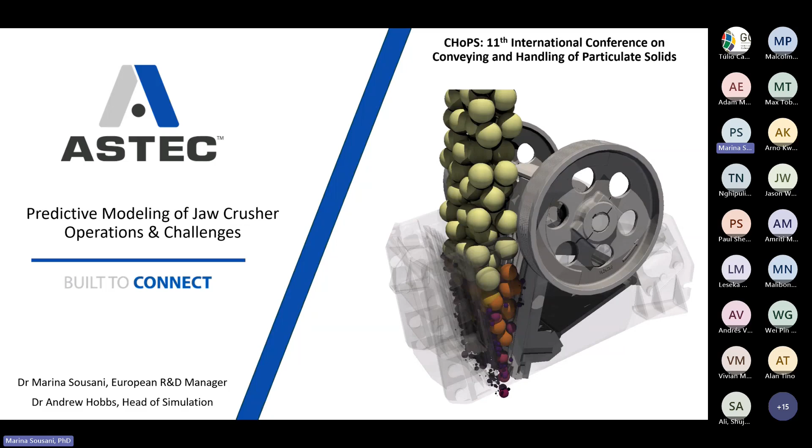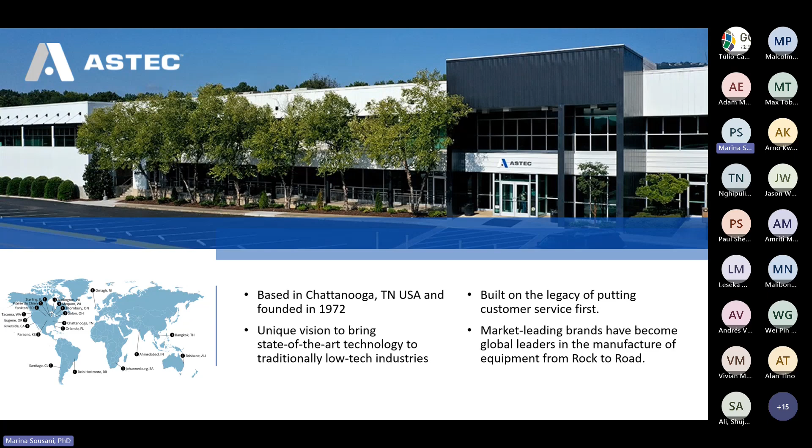A few words about Astec. The company was founded in the 1970s. The headquarters are in Chattanooga, USA, with a number of facilities around the US and a few in other places in the world, including Europe, even though you cannot see the European facilities on this map. Astec owns a number of market-leading companies that have become global leaders in the manufacture of equipment. Overall, the vision of the company is to bring state-of-the-art technology to traditionally low-tech industries, but also a very important part of our vision is to stay closely connected with all of our customers.

Astec Industries is a global equipment manufacturer with a portfolio of brands serving material solutions, infrastructure, and mining industries. This means we manufacture more than 100 products, from rock crushing and screening plants to hot mix asphalt facilities, concrete plants, milling machines, asphalt pavers, and material transfer vehicles. Overall, the portfolio covers everything from rock to road.

A little bit of introduction regarding this old problem: the basic design of jaw crushers hasn't changed much since, I think, the 1850s. The basic components you can see in the image: we have a moving jaw, which forms a 4-bar mechanism rotating about an eccentric axis, and a toggle plate that forms the lower linkage and provides some adjustability. Like many old designs, the durability of this machine is due in large part to its effectiveness. Often older designs can be difficult to optimize simply because the trial and error and failures and usage over the years have already done most of the optimization for us.

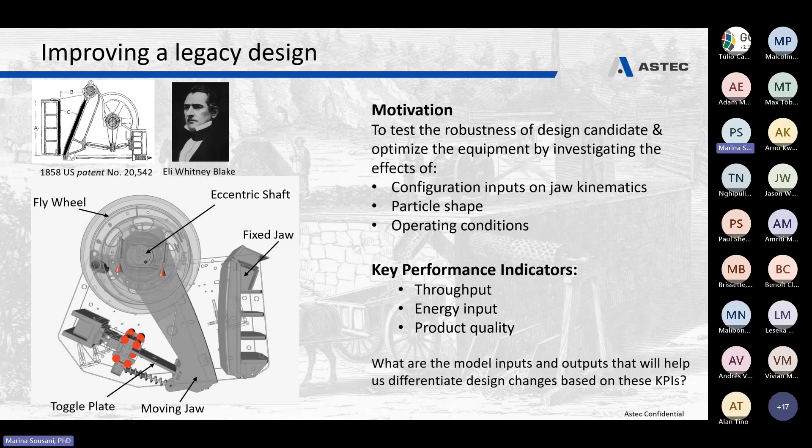So in our projects, the key performance indicators that we mostly looked at were the throughput, the energy input, and the product quality.

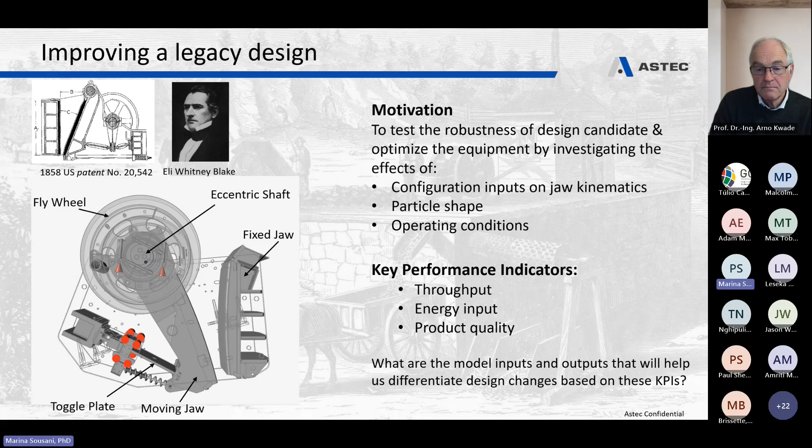In many of our applications we break rocks, so the Tavares model is the most suitable one, or at least the one we prefer. It uses empirically derived parameters to determine the impact energy at which a particle will fracture, and it has been extensively validated and improved, and is available in several DEM codes right now.

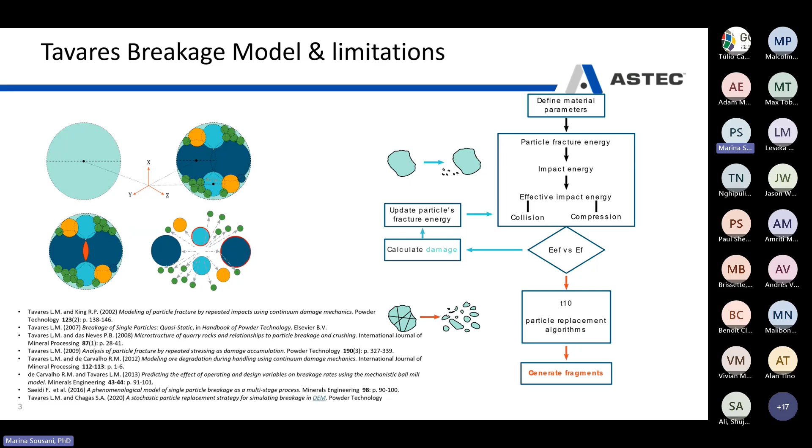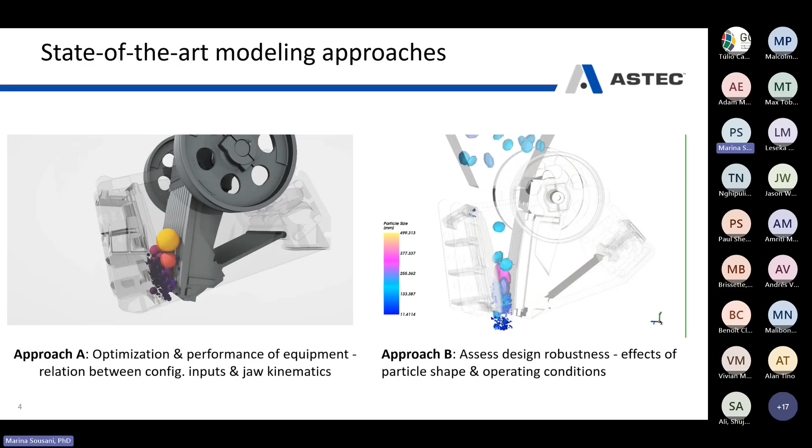Okay, so I'm going to show you two projects. We focused on optimizing the equipment and obtaining a better understanding of jaw crusher performance for different conditions, but we also wanted to assess the robustness of a candidate design and the effects of particle shape and operating conditions. For these two projects we used two commercial codes, EDEM and Rocky, to perform the relevant simulations.

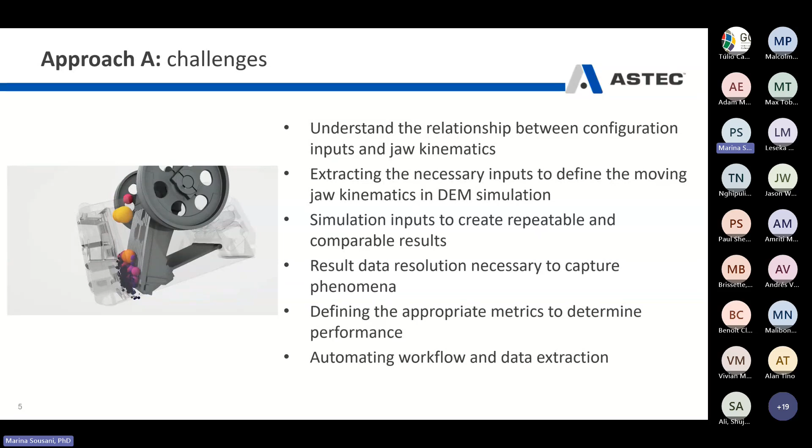Now, the objectives or challenges of this first project were to understand the relationship between the configuration inputs and jaw kinematics, to extract the necessary inputs to define the moving jaw kinematics in a DEM simulation, to understand what kind of simulation inputs we need to create repeatable and comparable results, to decide the best resolution of results necessary to capture the phenomenon of interest, and to define the appropriate metrics to determine performance. Finally, one of the objectives was to automate the workflow and data extraction to make our life easier, I guess.

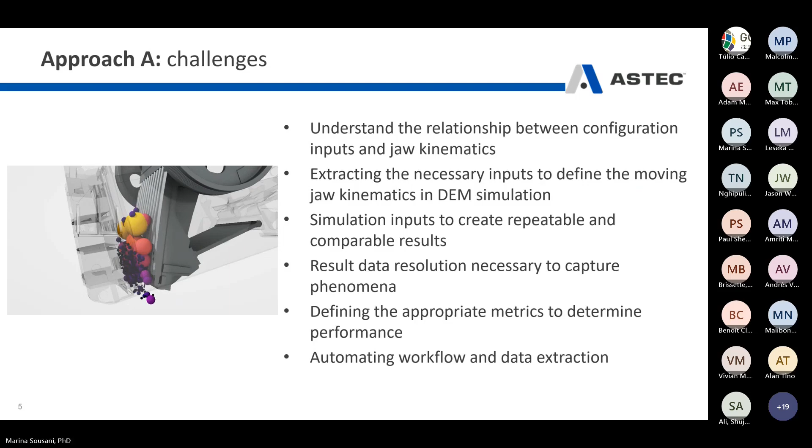Okay, so the first step was to gain an understanding of the relationship between the different geometric inputs and the kinematics of the moving jaw. We constructed a quasi 2D model that we used to extract the inputs required to define the kinematics, and we ran a DOE. The inputs of this first DOE were mostly the toggle angle, eccentric radius, and frequency.

Then we used the outputs of this first DOE, which were sinusoidal translations and rotations, as inputs into EDEM, the commercial code, and we ran a second DOE using the breakage model and different feed conditions. The measured outputs included the outlet mass flow, torque, force, power, and pressure on the moving jaw.

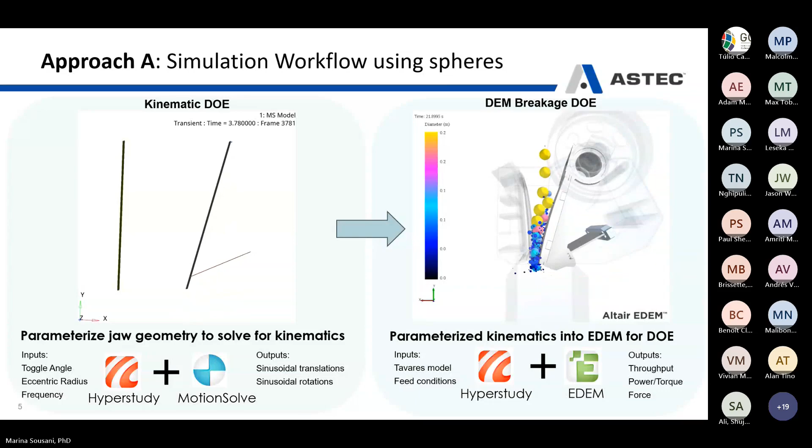From the first part of the DOE, to gain an understanding of the effects of the different geometric inputs on the moving jaw kinematics, we plot the horizontal and vertical stroke at the bottom, the lower stroke, and top, the upper stroke. We can see that as the toggle angle increases, the lower stroke also increases, with greater change in horizontal than in vertical stroke.

This is the horizontal increase and this is the vertical increase. We also observed that increasing the eccentric radius results in an increase in the stroke, effectively offsetting the curve higher. For the upper stroke, we see no dependence on toggle angle, with the horizontal and vertical stroke being equal.

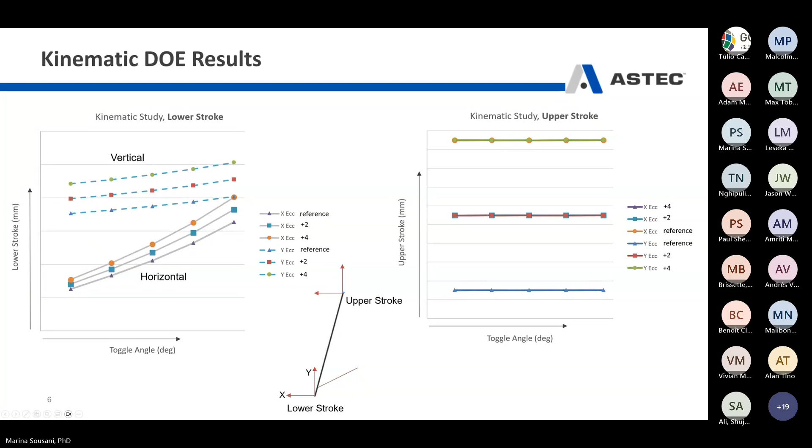So we ran the DOEs, but what about the outputs? What do we need to measure? What save frequency is required? DEM, you know, that's calculated at very small time steps, but the disk space that we have restricts what we can save. This is a major concern when we are talking about DOEs.

DEM provides a rich set of data for analysis. In order to compare different jaw crusher configurations, a consistent method of analysis is necessary. The data output is inherently transient with strong periodic fluctuations, as you can see.

Hello? Yes? Sorry, I was listening. Please go ahead, Marina.

So what I was saying is that the data outputs are transient and they have strong periodic fluctuations, and this is happening because of the cycling motion of the moving jaw.

In addition, there are some startup effects where there is a delay, for example, from the creation of the first particle to reaching some steady state condition. And since the steady state condition is more representative of a normal or standard operation, we investigate the time to steady state with the goal of minimizing the overall simulated time.

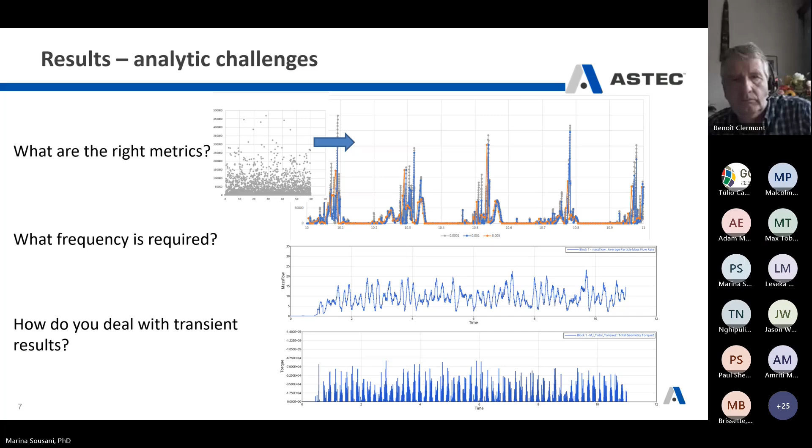Now, a big question is about how particles are fed into the jaw. I'm showing here two examples, a constant single particle stream at the top and then a choke condition at the bottom. What we observed is that trends for outlet mass flow were more or less the same for the constant stream and the choke flow, but they were opposite when we were measuring torque.

Now, which one is right? Maybe both are correct, depending on what we want to focus on.

Sorry, Benoit, you want to ask something, or we're listening? We're listening. Okay, yeah, please go on. I think there was a mistake.

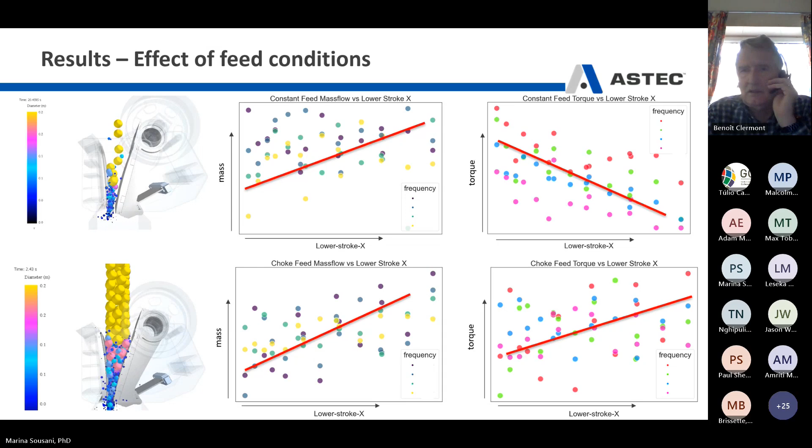So I was saying that maybe both results are correct, depending on what we want to focus on: energy usage and cost savings, or detailed final product. It really depends on the needs of the customer.

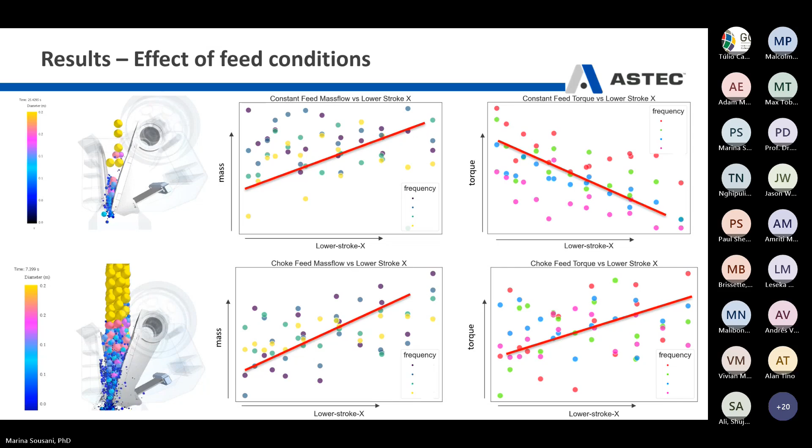Now, the DOE gave us a lot of data to analyze. I decided not to show specific graphs and specific very targeted analysis here, because the key point is the bigger picture. And the bigger picture is that we combined different inputs and outputs, and as we started comparing them, we began to see relationships.

Investigating compound variables allowed us to see clearer trends from the results, which helped us identify optimums, which is what we really want. For example, we see that torque has a strong linear correlation to the close side setting of the jaw, both for horizontal and vertical stroke.

Specifically, increasing the stroke shows a decreasing trend for torque. These were some very interesting results that we used later on in the analysis.

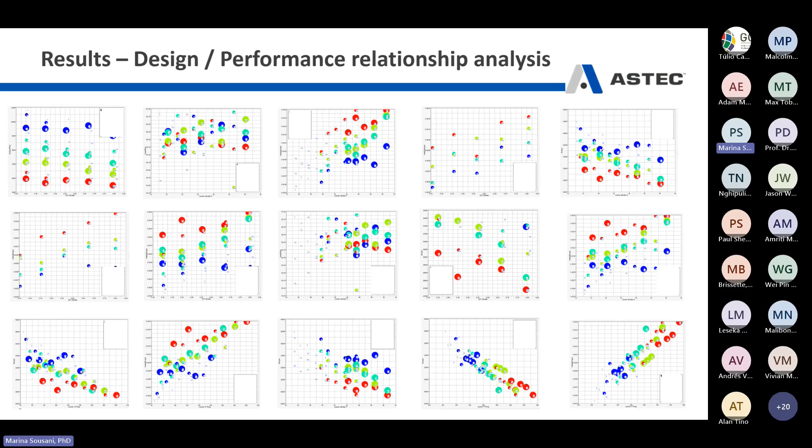Now, one of the things we noticed in the data is that the rotational speed has a significant impact on most outputs, and that normalizing by frequency, we could see trends more clearly.

Also, the results seem to be a bit more consistent at higher frequencies. We see less variability, and we see that because of the area that they cover.

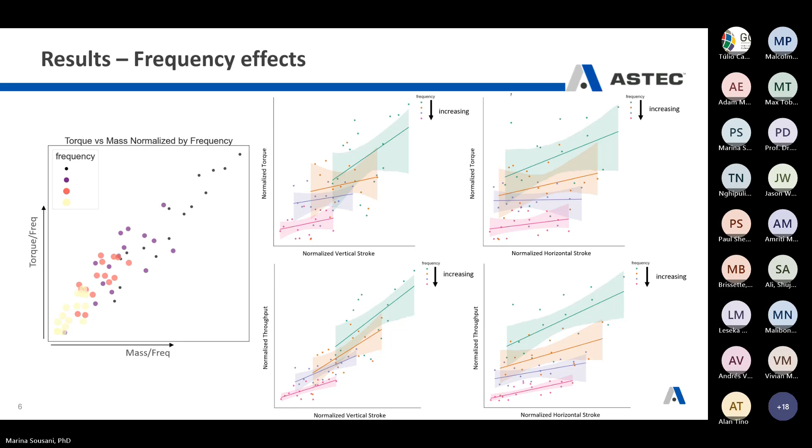So summarizing the results from this first project, we used multi-body dynamics and DOE, design of experiments, to define jaw kinematics and its relationship with geometric changes. We used DEM and the Tavares breakage model to explore jaw crusher performance for different feed conditions and jaw kinematics. We identified some consistent trends for mass flow and torque and their relationship with horizontal and vertical stroke, and we definitely observed that frequency is the dominant influence on torque and mass flow.

Specifically, we concluded that lower frequencies are more energy intensive and higher frequencies are more energy efficient. Also, for maximizing the throughput, a lower frequency setting would be better. Now, of course, questions remain about the best methods. What are the best methods for transient data analysis, and what are the best metrics to correlate performance?

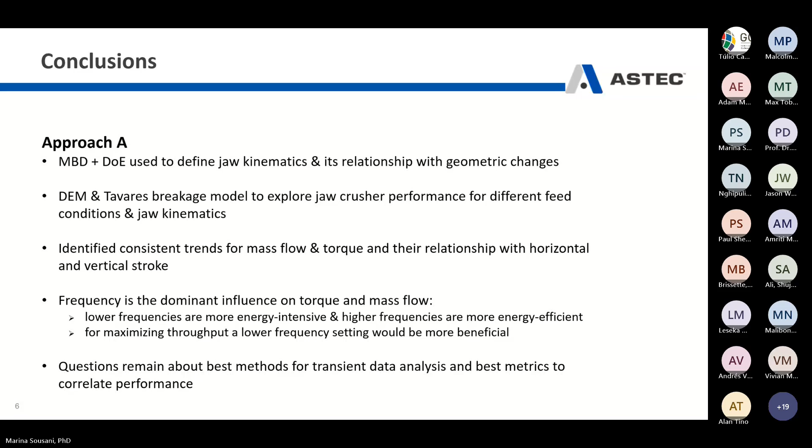Now, moving on to the second project, here we set up a number of simulations with various operating conditions. You can see on the table on the left, we used constant feed rates with 3 levels, low, medium, and high, as well as different motor speeds and pendulum motion. And most importantly, we used shapes, starting from a roundish polyhedral shape, the P1, and moving towards a more elongated shape, the P4.

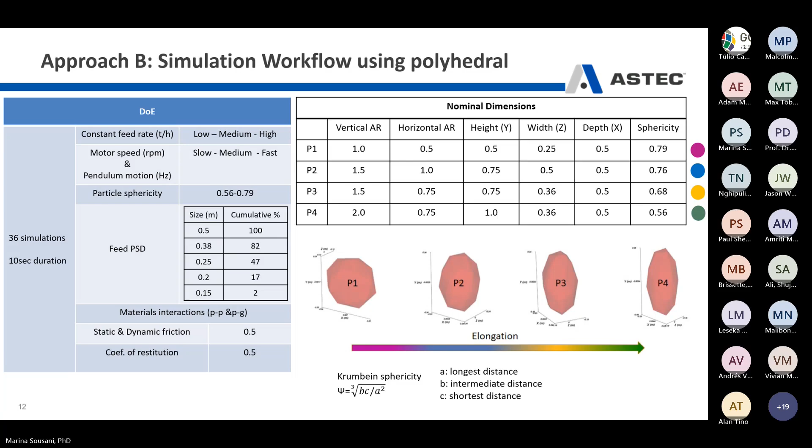Now, efficiency of the equipment and operating conditions is critical for design decisions. Standard metrics is the relationship between energy consumption and throughput. The analysis pointed us to the best, and also the worst, design areas. From the best area, we concluded that design 29 is probably the best candidate because it gives us the smallest fragments and a big amount of them with the least energy consumption, which is the criteria.

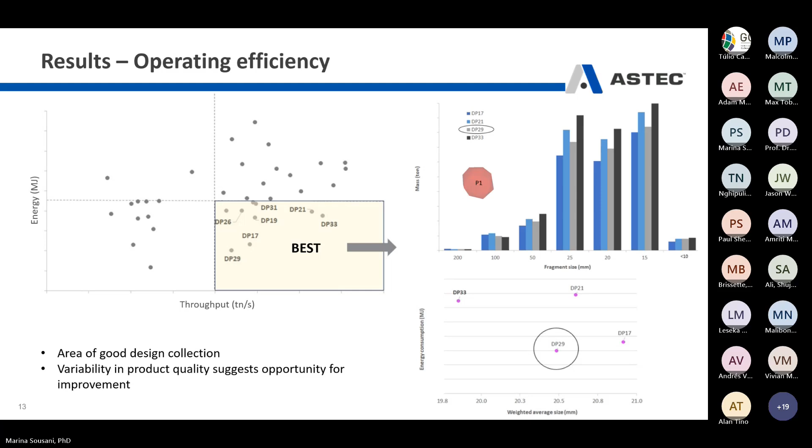Okay, so some bubble graphs. I know they look busy. I'll try to give you the bigger picture. We observed that increasing throughput doesn't necessarily lead to a uniform product, and increasing energy also leads to less uniformity.

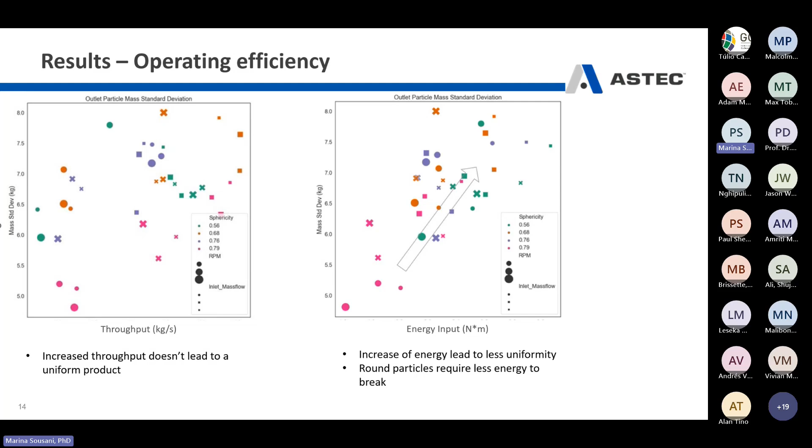We noticed that the round particles, which are the pink ones, require less energy to break, which makes sense to a point. But this is something that doesn't really agree with the feedback that we get from the crusher operators. I'm going to come back to this during the conclusions.

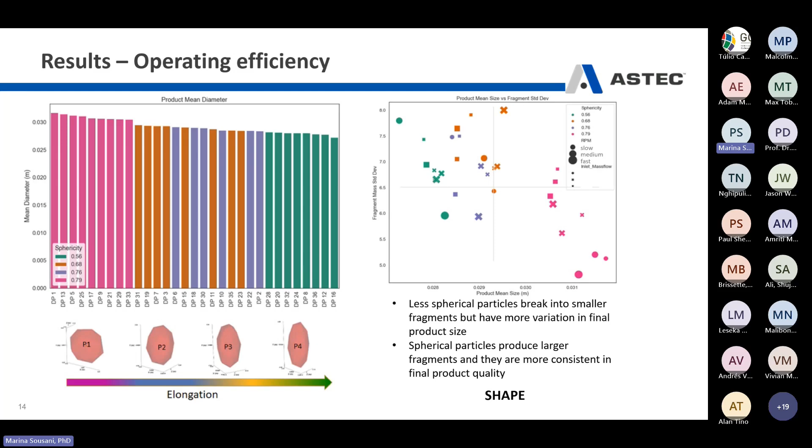We also observed that the round particles produce larger fragments and are more consistent in final product quality. Finally, the less spherical particles break into smaller fragments, but we have more variation in final product size. Now, to all this, we need to consider that the model is shape agnostic, so we do not have any information on what type of shapes we get at the end of the process, which is quite important.

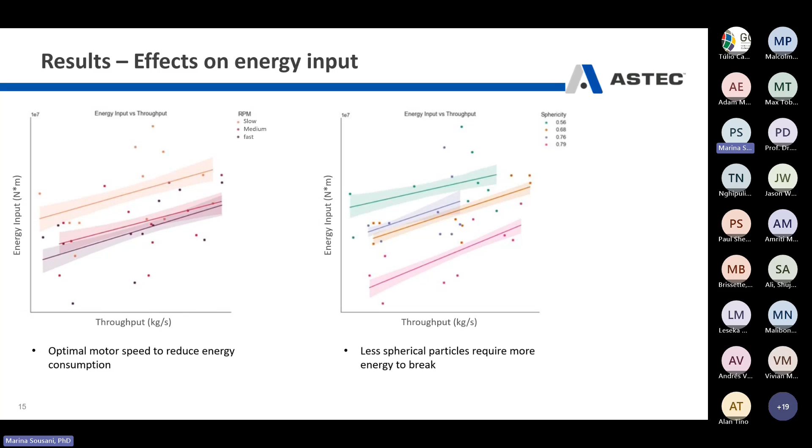For this project, we managed to conclude an optimal motor speed to reduce energy consumption. We also concluded that the less spherical particles require more energy to break. All this variability in the results highlights that there is no significant bad design here.

We got positive feedback from operators on the overall operation of the machine, but we got some comments that I'm going to explain in the next slide. And of course, the variability always is an opportunity, gives us opportunities for improvement.

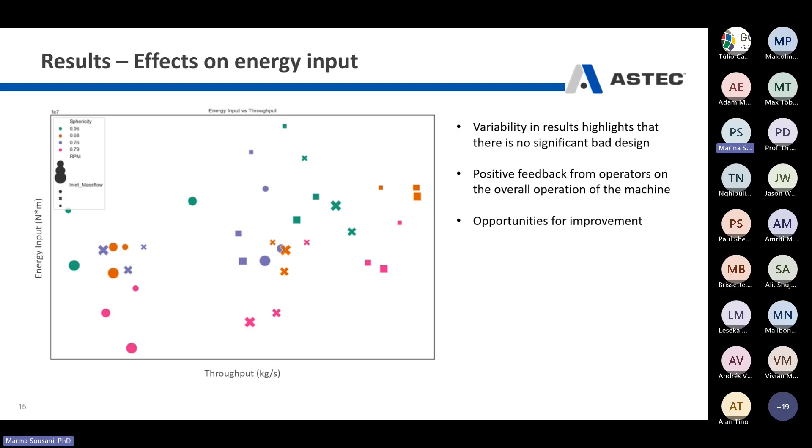Now, summarizing the results from the second project, we observed that the particle shape has a significant effect on the energy requirements, on the product mean size, and the product variation.

Specifically, we saw that the more spherical particles require less energy to break. They break into larger fragments, and the product is more uniform.

Whereas the elongated particles, they require more energy to break. They break into smaller fragments, and the product has more variation.

So they told us that the spherical rocks, they require more energy to break. And this is something that the model is not able to capture in our cases.

Thinking about this, what the operators told us makes sense because...

Let's say the round rocks or round particles are more compact and they're quite smooth in contrast with the other irregular shapes, where we have corners, and these corners are the ones that are going to break really fast.

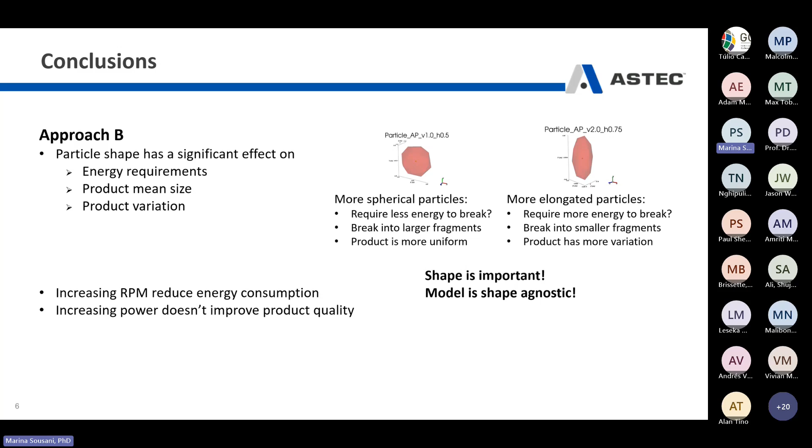Another conclusion we got from this project was that increasing RPM reduced the energy consumption, and increasing power doesn't necessarily improve product quality.

Now, all these are very nice in terms of amazing results you can get out of a sophisticated model, plus when you're using a very good solver that is coupled with multi-body dynamics to solve for the mechanical interaction as well.

And of course, when you use the highest quality GPU card for fast results.

In terms of accuracy, we are using size distributions that reflect reality, and particle properties that are calibrated against real rocks. We are rendering using real-time ray tracing. So this kind of simulation setup is really as good as you can get.

But this still is not helpful for design optimization. Now, why do you think this is happening? Well, this is because if I run this simulation once, I will get an answer.

But if I repeat the same simulation, I will get a different answer. And this will happen every time. And this is because all rocks are different, and they break differently.

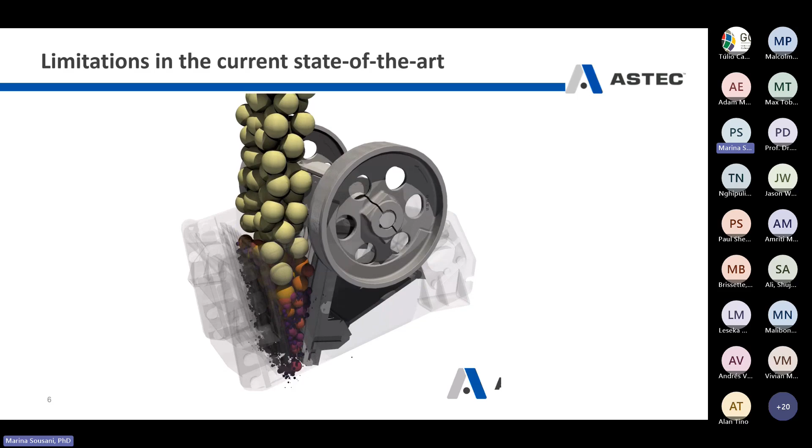And this is great if we are talking about the foundation of the model, because it is able to capture reality. But it is really a massive problem when we want to compare designs to take decisions.

Let me explain quickly what's happening. The model has some, let's say, sources of variation that allow it to be so good, but at the same time, these sources of variation provide great limitations to design optimization.

But in crushing applications, we usually have hundreds of particles. We don't have thousands and thousands. So it is very difficult to capture this distribution if you don't have enough particles in your system.

And this is going to affect then the forces, the torques, and the material throughput you're measuring.

And to add another difficulty to that, we need to consider the child fragment distributions. So all these make the model very good, but introduce a lot of problems when we're looking at comparing purely designs.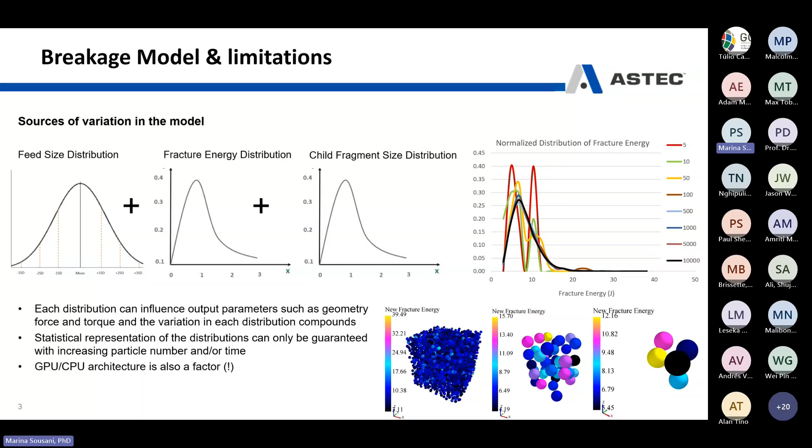And also, even if we are using only GPU, the results are going to be different from one GPU to another. So all these things are really things that we need to consider when we want to compare designs.

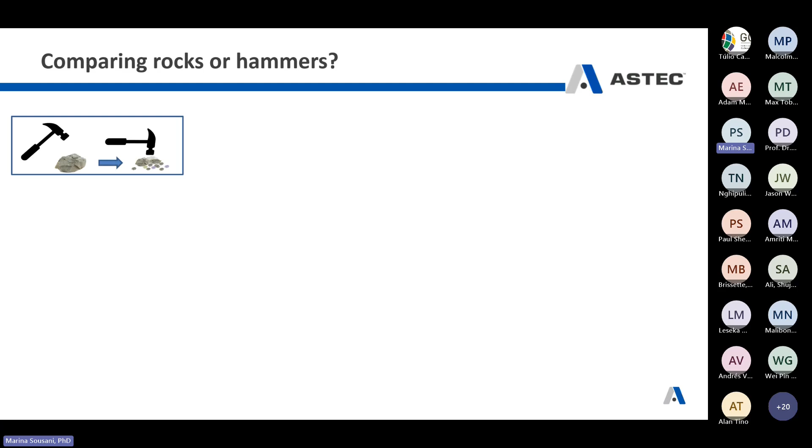So let's see how it looks when comparing designs. If we wanted to compare how a hammer breaks rocks, we might want to test how a single hammer breaks different rocks.

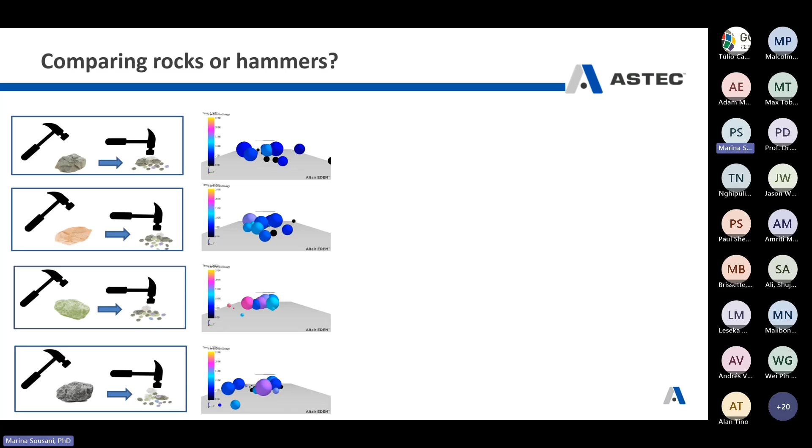Of course, we would expect each rock to break differently, and the Tavares model captures exactly that.

But what if we want to compare hammers? Ideally, we will want to use the same rock to test each hammer, so that the only difference is the hammer and not the rock.

Obviously, this is completely artificial, and we know that because in reality, rock crushing is an irreversible process. We cannot unbreak a rock and then break it again.

But let's say that by tuning the model somehow, we can eliminate the sources of variability I mentioned in the previous slide, so we produce the same rock over and over again, and the only effect we observe comes from the hammer. But this is very difficult to achieve. It requires great knowledge of the model, and sometimes it feels like you are hacking the tool. You need great knowledge of the software as well, and even then, full repeatability is impossible to achieve. If you're using polyhedrons, for example, this is impossible to do at the moment.

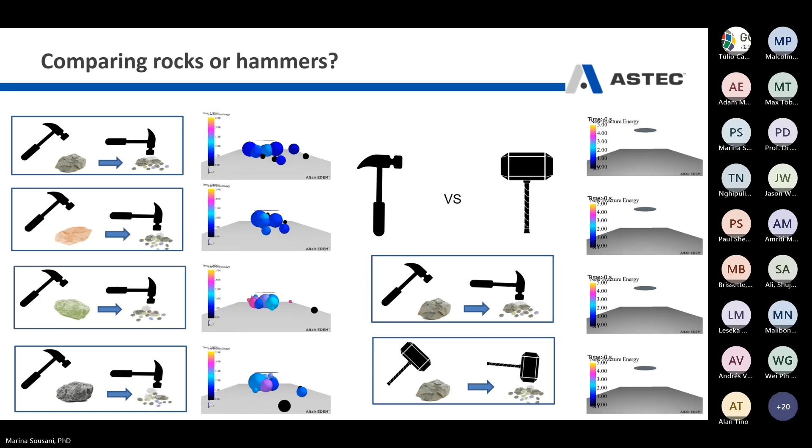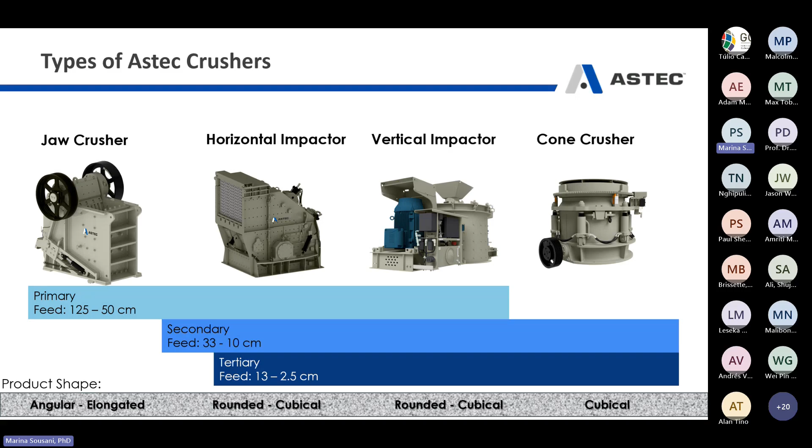Okay, so I guess you remember the slide. The key point here is that apart from the various crushers the feed needs to pass through, each crusher produces a different shape. The type of shape we have at the final product is very important, because it leads to good quality pavement due to interlocking and surface friction. When the shape is not suitable, it has a significant effect on the life cycle of the pavement, which is very trendy nowadays with all the regulations about sustainability in industry. There are some recent studies trying to investigate this, but we definitely need more research in this area. The shape we get at the end of the process is really important for this kind of application and for this industry.

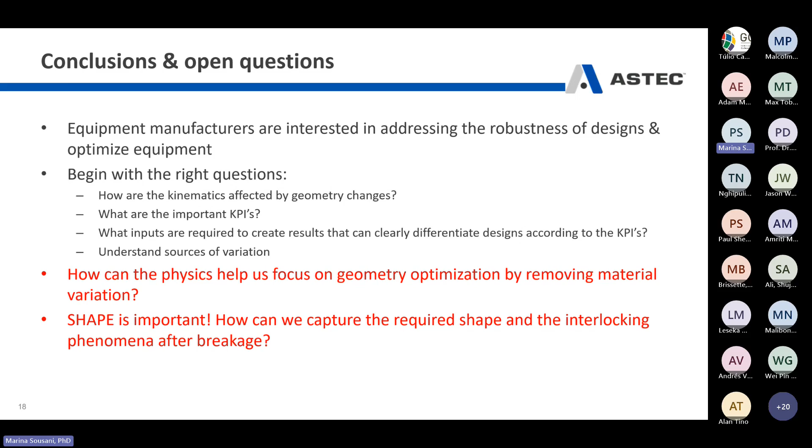So to conclude what we saw today: in industry, we are very interested in comparing designs. Failing to do so means bad business. So when we use simulations, we need to start asking the right questions about what the important parameters are, how we measure them, and what the right physics is to use. Most importantly, we need physics that allows us to focus purely on geometry optimization by creating artificial breakage scenarios if needed, removing variation that comes from the material. Finally, shape is critical, not only as an input but more importantly as an output, as I explained in the previous slide. We need physics able to capture this final shape and the interlocking phenomena that take place. And with this slide, I'm finishing my presentation. Thank you very much for listening, and I guess we can have a chat.